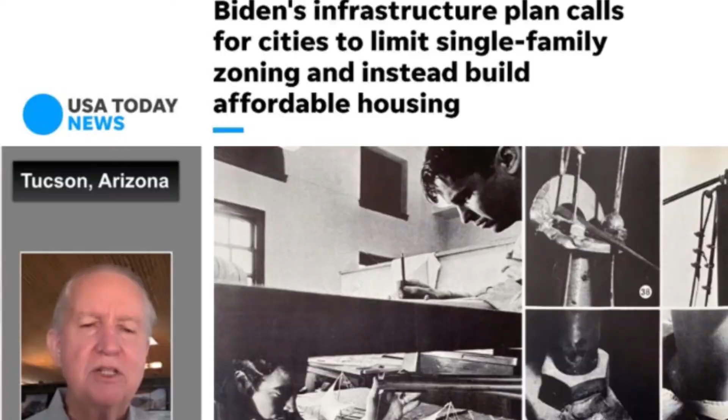That gets us back to quickly recapping what we did in the last show, Larry. You had perfectly embodied the tensile membrane system at its very best with the German Pavilion at Expo 67 in Montreal. While this is a very civic and not elitist typology, you wanted to push it to an even more egalitarian typology of multi-dwelling. Let's quickly recap what we talked about in the last show.

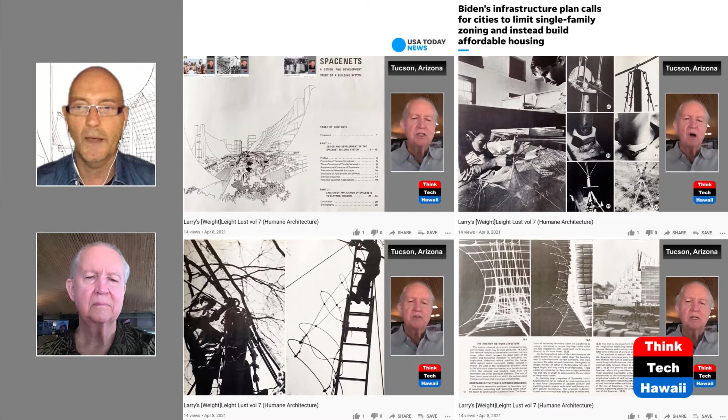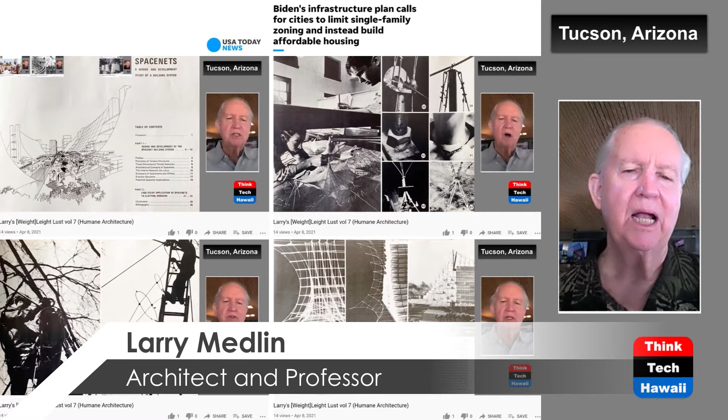We talked about the Spacenet project, which we did as a two-part process. We built an experimental structure, shown in the lower left. What we'll talk about more today is the test of whether a Spacenet could really be developed as an architectural entity. We took a site in Clayton, Missouri, a suburban center outside St. Louis, and accepted a graduate student's master's thesis about the planning principles.

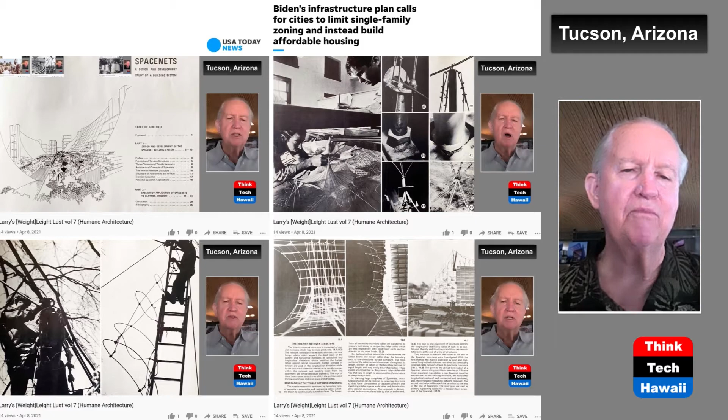There was a desire in the Clayton government to make a link between the Clayton Governmental Center and a nearby highly used public park, and to establish a place where people could live and dwell with multi-use activities, along with specific private dwellings, while also having large public gathering spaces and activity that could theoretically go on 24 hours a day.

To illustrate that, let's look at the next slide, Larry. The upper right is the outline of St. Louis, with the Missouri River going across the top and the Mississippi River down the east side. The main east-west street goes out to an L-shaped gray spot — that's Clayton, the silhouette of Clayton, which you can see echoed below. Within that is the model of our specific site in Clayton.

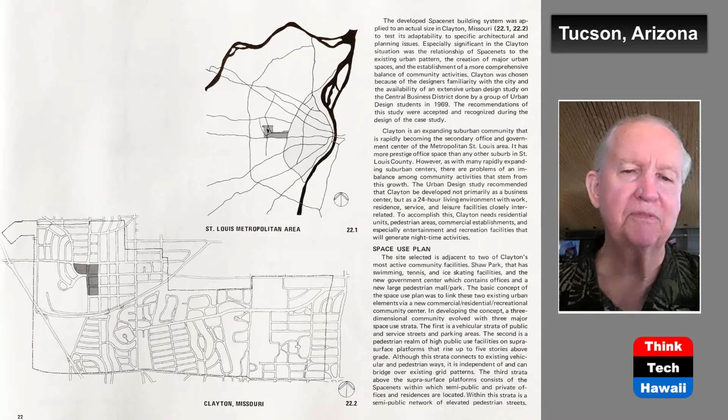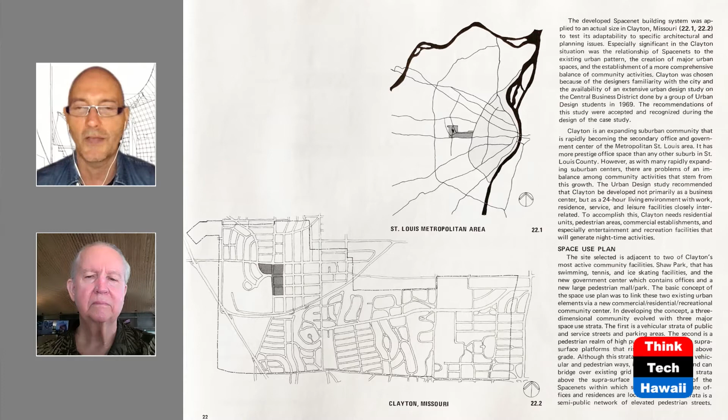As educators, we always tell the emerging generation that if there's one drawing we prefer over all others, it's the section. So let's look at your creation in this comprehensive sectional drawing. Next slide — walk us through what we see, Larry.

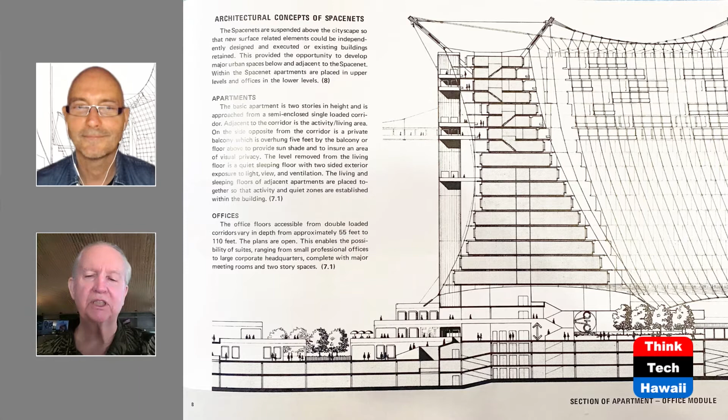That's the Spacenet. One of its main advantages is that it floats above the ground, free and independent. This would allow it, as in this example, to go over existing buildings if desired, or to enable new major public event spaces and activities underneath it. It can also be configured so the edge points and anchorages are placed discretely in reference to the infrastructure it's over.

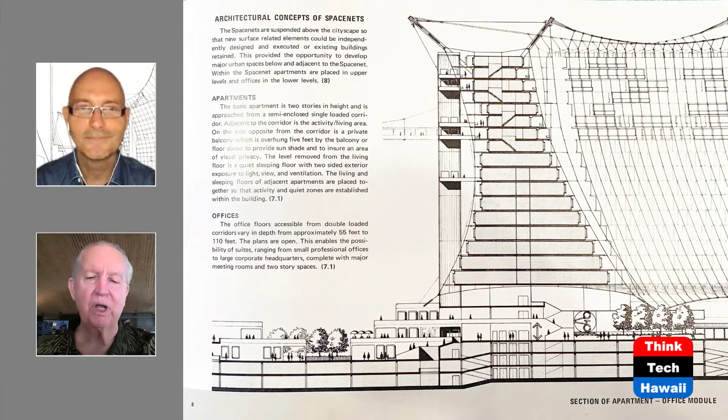Below that, at ground level, is space reserved for automobiles, with parking and services for those levels. In between are three levels that interact with public pedestrian space, where you can move around, make connections, and go up and down. If you look specifically at the section, right at the bottom, you see a stair coming up that leads right into a public space.

It's put as, for example, to illustrate the potential for a major public assembly or an event center to happen in a spot like that.

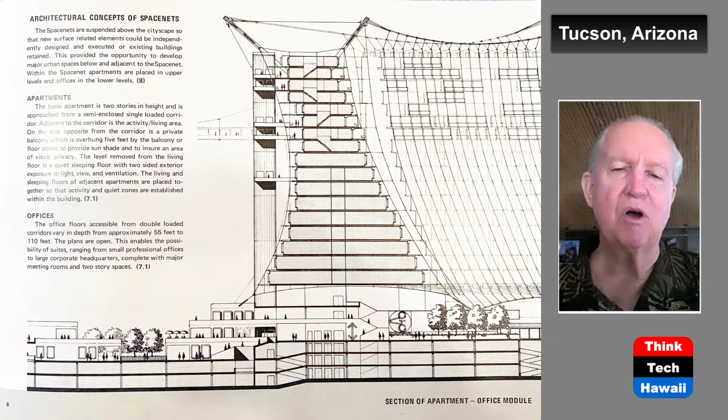The other thing we're going to look at in later slides is this basic SpaceNet cross section. The narrow part up at the top is reserved for a single loaded corridor for apartments, and where it gets wider down below, it has a central loaded corridor for office spaces. In a later slide, we'll see that if you continued the dwelling units down the right side instead of offices, and put an axis between it and flipped it over, you'd end up with an open space in between.

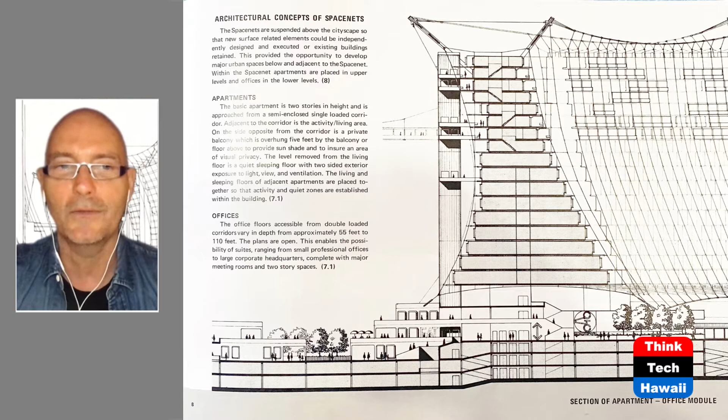As my professor Schwager used to say back when I was a student, 'that model I don't trust, I don't believe.' Here it's almost reversed - this drawing looks almost unbelievable as structure. So you tested that through your methodology of model making, and let's look at that on the next slide.

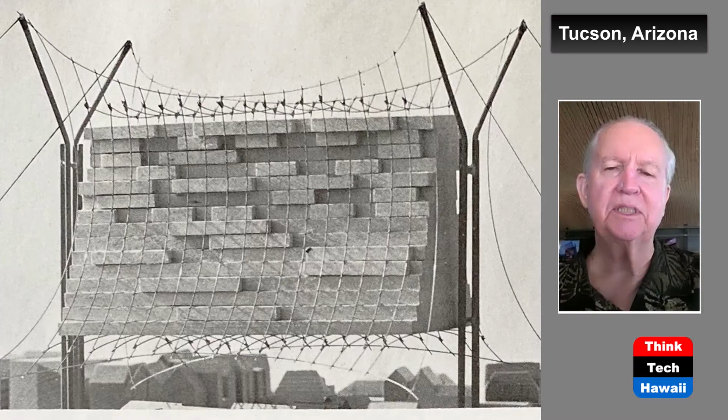This is a basic test block for a SpaceNet. What you see is the principle: it's held up by a synclastic surface, a two-directional curvature of the same sign, that lifts it up and supports the hanger cables and pre-tensions the system. Then it has just the inverse down below - a restraining net of cables that draws it down. These go out to major ridge cables and tie-down cables. The critical thing is that a SpaceNet block has to be laterally stabilized.

That can be done by, as you see suggested here, a couple of guys going out to the right at the top and left at the top, or it could be tied into another SpaceNet element to keep it as part of a system.

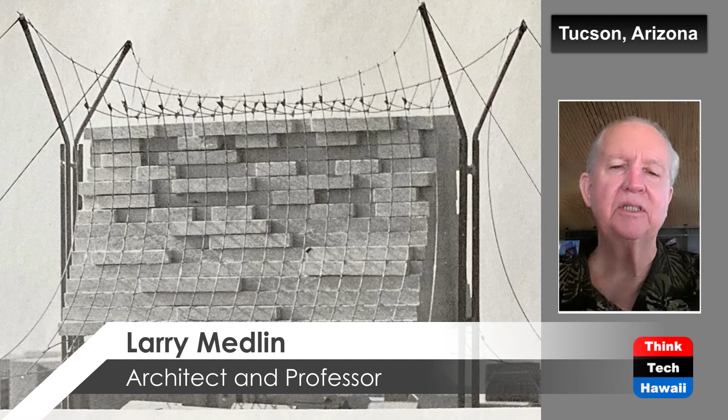Sometimes you can use rods or little wires and solder them together rather than other methods - that's exactly the way this thing was made, which means you start out very systematically. You start in the middle, then progress out, and if you make a mistake, you can come back, touch it with solder, loosen it, and adapt. The important point is that the perimeter cable, or in this case what would be the suspension cable if it were a bridge, has to be a smooth, continuous curve.

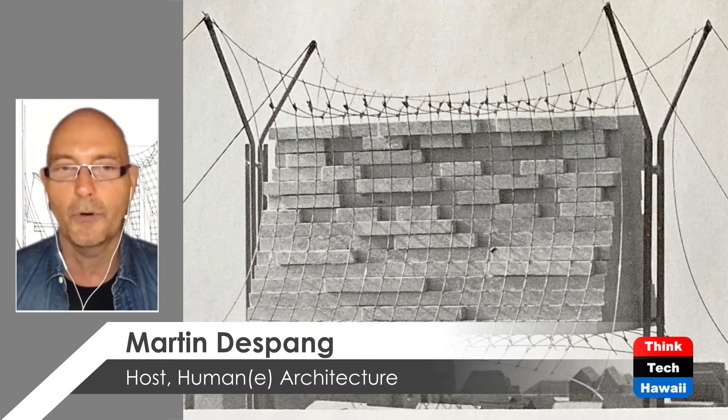As we've been talking about, this tensegrity way of thinking and building is, more than any other typology, always about zooming in and out. So while soldering the little connection points, your mind was zooming out to how that would come together in reality. And as you mostly tested that through real scale prototyping, here you also tested through drawing the details. Let's look at that in the next slide.

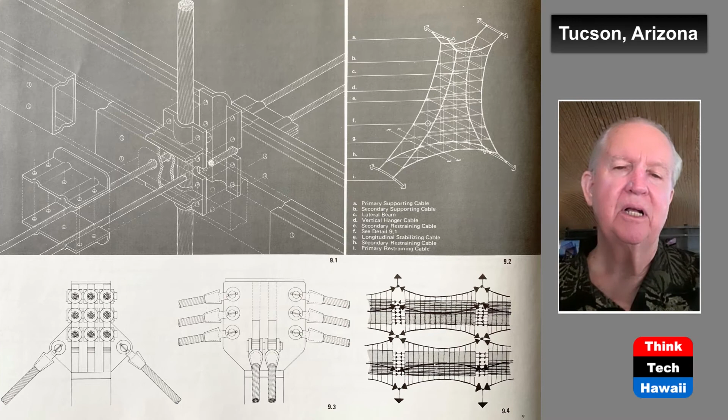This is the basic joint, shown on the upper left slide. You see the big cable coming down is the main hanger cable, and then there are cables going to the lower left-hand corner and to the upper right - those are the lateral cables that pre-stress the system and keep the vertical hanger cables in the correct position in the SpaceNet. The front-to-back element is actually a beam.

The reason for that beam is it spans front to back, and that allows you to slide the capsules - the modular elements we talked about in one of the last shows - and assemble them in different combinations: a full module, a half module, an outdoor wall, and a patio module, to make a whole variety of things in terms of the plans and objectives for the various residential sizes.

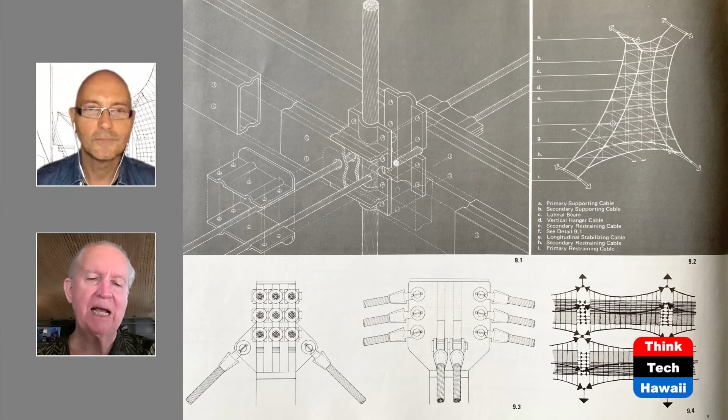And then on the bottom, that is a diagrammatic sketch of what the details would be for one of the tops of the main mast. You see where there's a bundle of nine cables in the middle—that's the sling cable running the full longitudinal distance—and then the ridge cables that go out to the outside, shown on the left and right, stabilize that. You can also see that from another view direction right next to it.

And then on the right, a diagram shows how a space net could be tied into another space net and take the loads, which eventually have to be tied down into the earth and anchored in some way. Not necessarily the earth—maybe the infrastructure below could be shaped and formed to be strong enough to serve as an appropriate restraining cable.

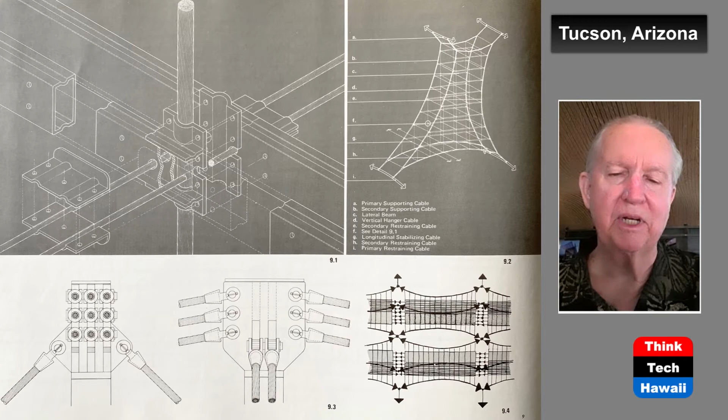And methodologically, while you're on this structural engineering side of it, at the same time you've always been thinking about the why, which is the social engineering. And that gets us to the next slide, Larry.

Well, this is what I was talking about earlier. If you look at the photograph on the left, that's one end of the space net. It's the space net that literally moves out to the left to the park next to it, and then goes down to the front of the picture, or the south, to make a connection with the governmental center. But if you look at the doubled space net where it's opened up on the upper right of that image, you can see there's an opening in there, and that's what I was describing.

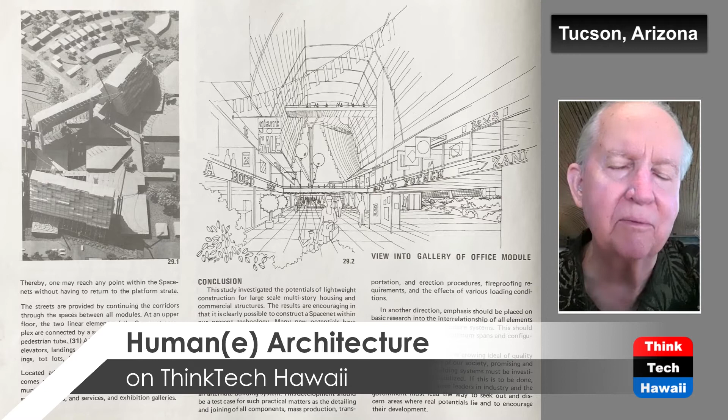In this case, it would have residences running down all the way on both sides to the ground, without any office space. But that would reveal this common public activity and social space with common-use activities, as you see in the sketch on the right.

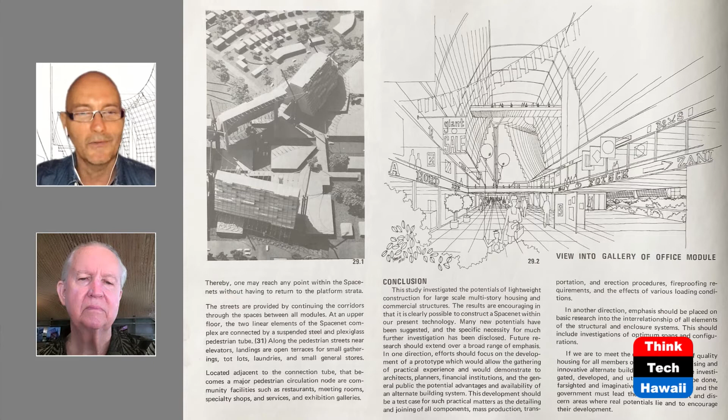And the model picture also perfectly portrays what the Biden and Harris administration is currently talking about—that we can't continue the sprawling single-story development we see in the neighborhood here. So you're kind of rediscovering what you were already onto decades ago: to densify, while still bringing the challenge and task of providing what people love in their single-family paradise, into the third dimension.

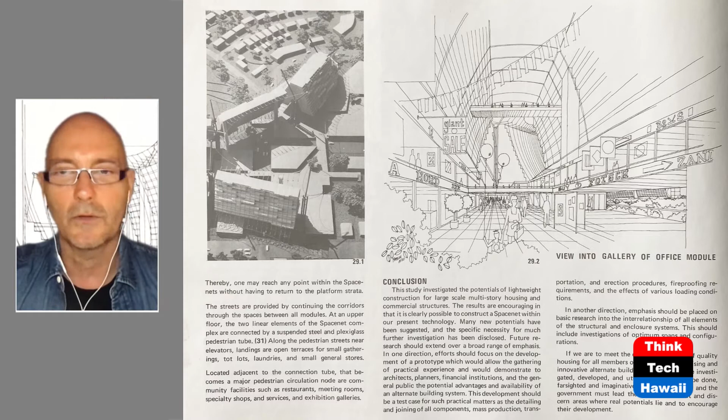And we're going to have a little reference picture, because we'll show it later. It somehow reminds us of the kind of housing that went with Frei Otto's work a few years later at the '72 Olympics, done by Behnisch and Partner. There's a lot of similarity in thinking and even in execution, at least on the conceptual level. However, in the making, in the materialization, it's the extreme opposite, and we'll talk about that later.

So let's go to the next slide—or did you want to stay on that one longer? No, this is just another view of it, showing how it opens up to public spaces. It even suggests the possibility of a little monorail or a suspended tram coming through to provide connections to local transportation.

And also, if you look at the photograph on the left, you'll see how the structure actually makes a bridge over a major north-south street in St. Louis County in Clayton, connecting that together.

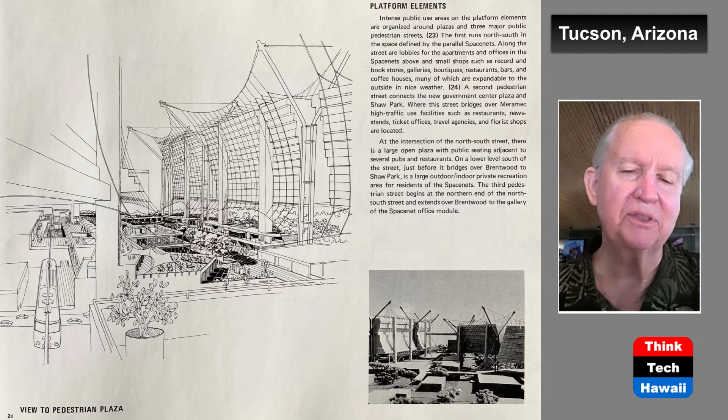The blocking you see on the right, coming towards us, is the connection to the governmental center. And then as you go across, it opens up, and on the left side it edges right on the park.

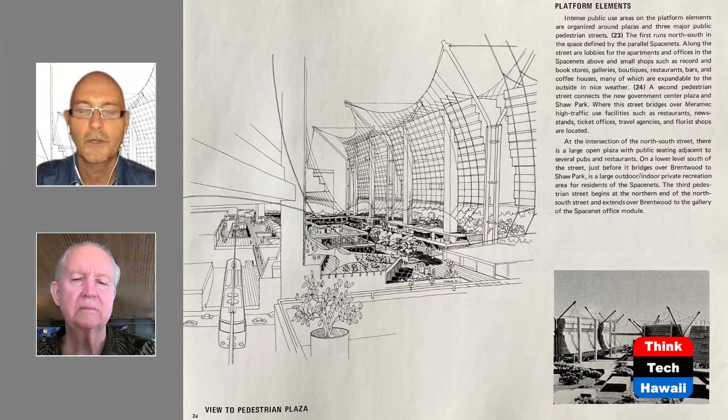And as you mentioned, we all know that the second largest focus of the current Biden-Harris administration is infrastructure, especially public infrastructure, and fostering public transportation. So you foresaw all that in a pioneering way.

So let me just make a few comments about the future of Spacenets. This was a hypothetical model, and we wanted to show that we could satisfy all the public safety codes for access and potential to fireproof the members and all that sort of thing. But an important thing is that when you get to this size and scale of a structure, it becomes very important to do analysis where you optimize the overall configuration of the system.

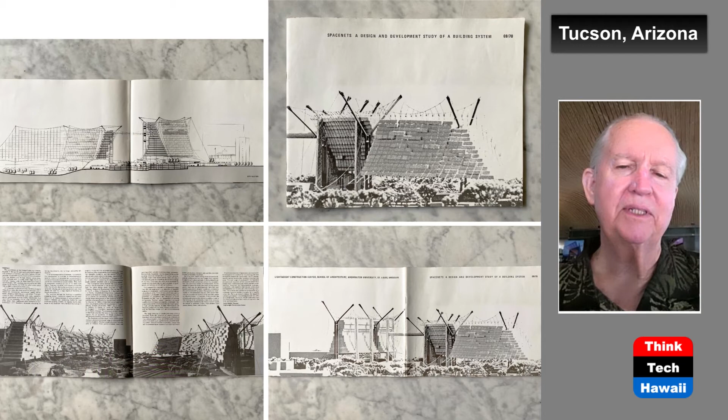And that kind of analysis would obviously be desirable as an interactive point in the design and development of any future Spacenets, even more critical than something like a suspension bridge, to really optimize the configuration. The point is that if you have excess material in something this large and complex, it goes in the opposite direction of what you're saying, providing affordable housing.

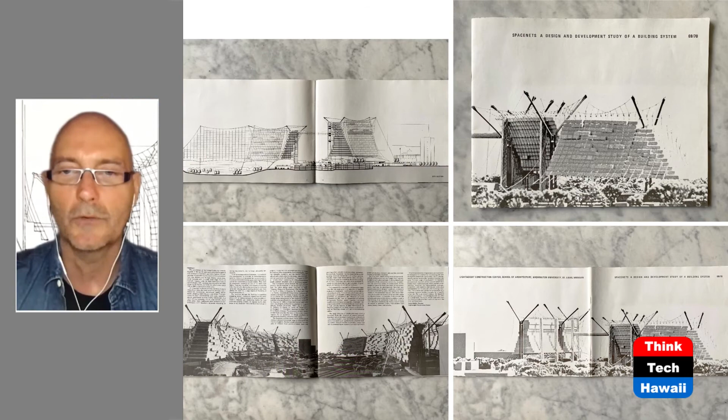Yeah, and it's fascinating, when you put this into the context of time, the zeitgeist of the 60s, the movement of the metabolist people—they had their kind of futuristic and fantastic visions first, and then it enlarged. It didn't really materialize architecturally in real projects, and in some cases it did, but often it was kind of losing its power.

Well, here it's really the opposite, because you're coming from having prototyped this technologically just before that. And let's go to the next slide.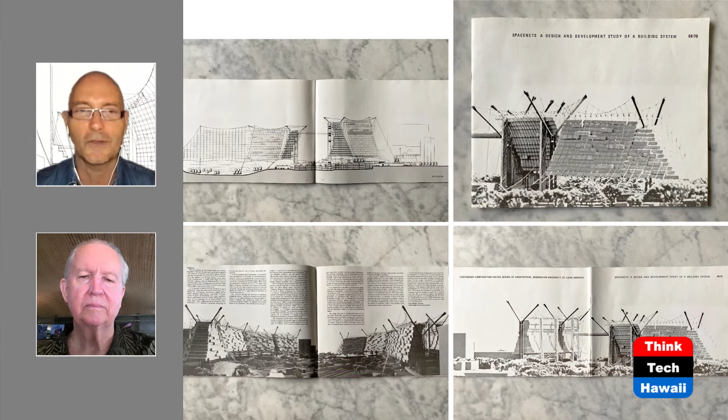We've been talking about that in many of the previous episodes here, but this is something you're calling your summer of '66, and this is something you pointed out to me that's out there on the web, and you wanted us to share that with the audience. So what is this referring to?

It was a standard bridge building technique adapted so that by combining pulling the guys around the perimeter and jacking up the mast, reading the strain on the mast and the tensile points around the perimeter, you could determine exactly how the stress was coming in, whether it was correct or too much in one direction or the other, and adjust it. So you had literally a balanced installation of the structure.

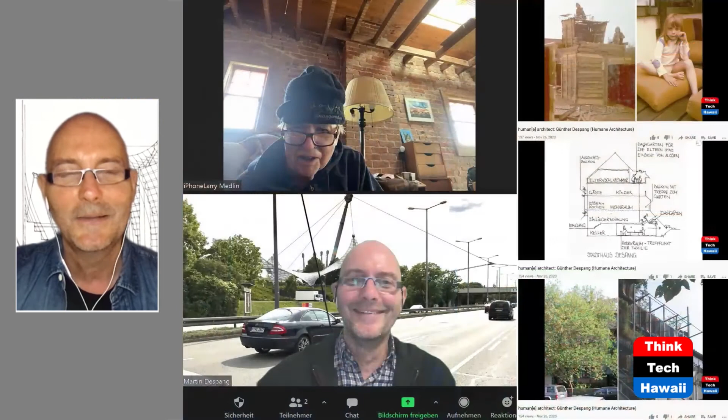To the left is me screenshotting a lazy Sunday afternoon when we were testing and coming up with the idea for doing the shows, resuming for the first time. We see us casually, and you up there in your house, which demonstrates many of the principles.

As your friend and colleague Frei Otto, you guys were interested in the free form, both structurally and architecturally, but also bioclimatically—how to live in balance with nature. You're demonstrating that as a total piece of artwork, basically Gesamtkunstwerk-mäßig, in your own life.

Tell us a little bit what your house looks like, what we're seeing. It was built out of Tucson brick, which is slightly larger than standard brick, with a double layer and an airspace in between, so it has a very good thermal time lag, sort of like adobe.

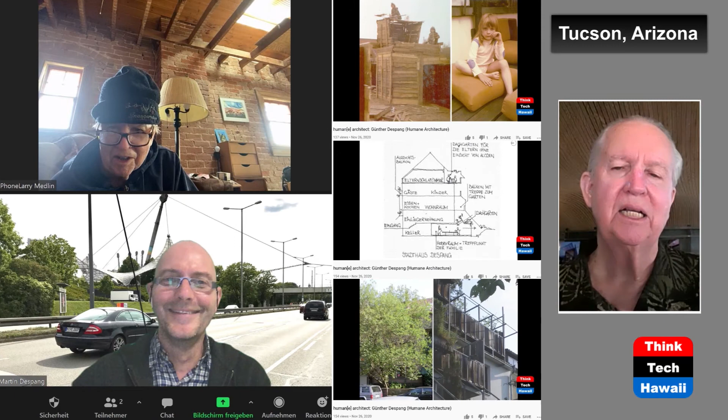This was on the second floor on the north side, where there are three windows down one side and a big window on the east side. I like getting morning sunlight coming in on the east side to tell me the day is starting. Above, I put in a Velux skylight that can also open for outdoor venting, and there's another skylight. I also have an indoor-outdoor thermometer.

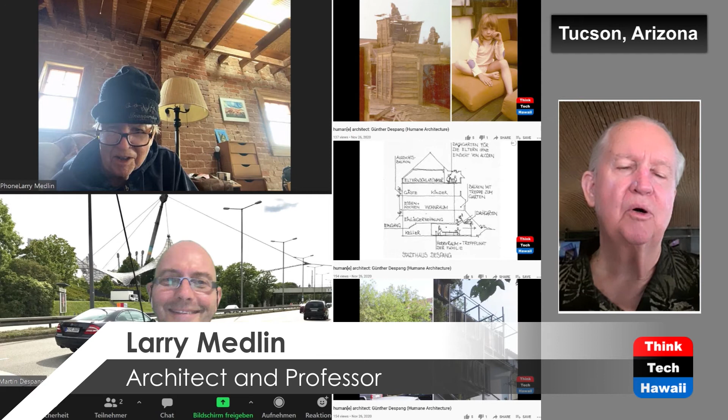So when I see it's cooler outside, when the temperature drops in Tucson, I turn off any cooling system and just open up the windows and let it vent through. That seems to work really nicely.

Basically, it's taking what was a very well-built building envelope for its time, and taking advantage of the fact that it's on the second floor, above the tree line, so there's always a good sustainable breeze going across from one direction or the other. By opening and closing the appropriate windows, you can always get a nice draft, or control it if you don't want it.

You know, for me the summer of 66 was special because I was born that year. Later in the 80s, this is the row of pictures on the right - my father bought this row townhouse and did basically the same thing you're explaining to us: opening up to the south, providing large outdoor lanais, sunshine and shading, and cross ventilation. So it was really that zeitgeist - we were all living at that same time.

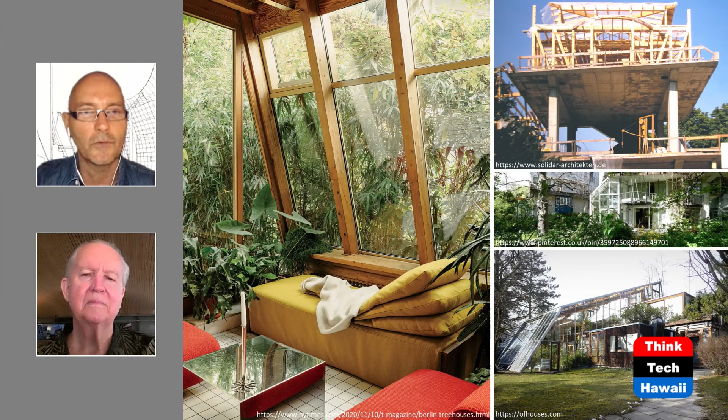That gets us to the next slide, because that brings us back to Frei. Frei had these two sides that weren't really two sides, they were one. Since you started out with these amazing typologies like the World Fair Pavilion and Olympic Stadium, at the same time Frei really wanted to demonstrate the sort of inhabitable freedom - Freiheit - living in balance with mankind and nature. This is a compilation of demonstrations of that.

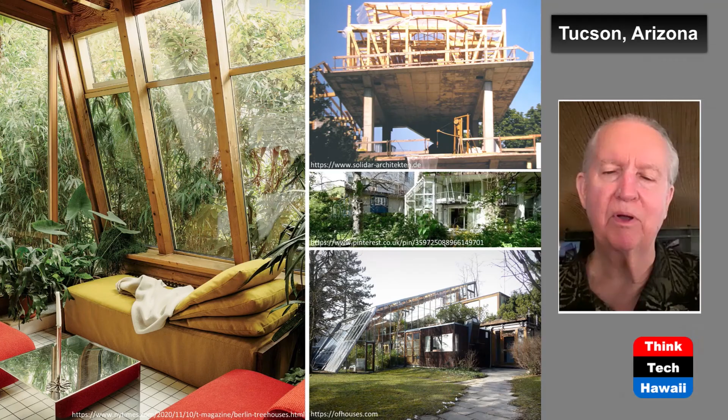Walk us quickly through, Larry. The lower one on the lower right is his house in Warmbronn - we may have seen photos of the inside. It's got a big greenhouse space in the middle that's open, with a rolling shade that can provide shade underneath or be opened. It has a big garage-door-size door of glass on the south so you can open it and bring a window into there. There's a spa area right behind that, and the bedrooms and living spaces wrap around it.

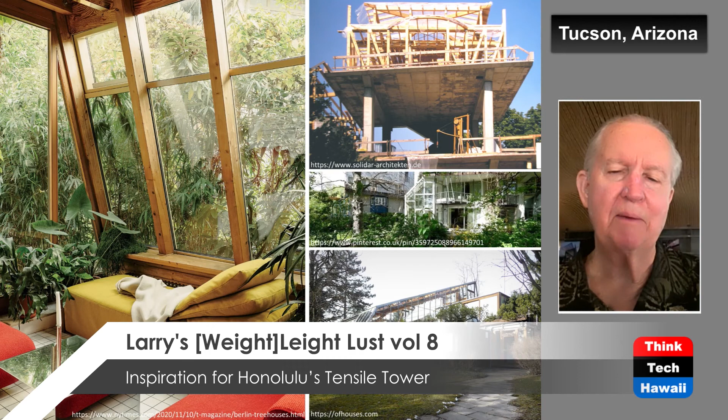One of the wings of the building goes through on the upper level to the north, and we're looking at it here from the eastern side. By opening that up, you can ventilate it in cross direction, and also capture sun in the greenhouse space, then vent that into the dwelling spaces and sleeping spaces at night.

And the one to the left demonstrates that in a fantastic project in the Tiergarten in Berlin, a co-op housing project he did. That's also shown in the two top pictures on the right, which interestingly shows he was doing something similar to what you just showed in the St. Louis project - you built a framework and the infill could be done almost sweat-equity style by the people.

There's just the raw framework construction in concrete, and the infill is the more homey, self-made kind of wood construction. Hermann Kendel was a principal working with him, and he was on site and followed this all the way through in Berlin.

There were guidelines as to how you would develop those dwellings, and people would simply come to a design review committee - when you proposed what you wanted to do, they'd give you comments. Each person was allowed to create the kind of space and ratio of glass and openings, but it had to be somewhat compatible with the existing area.